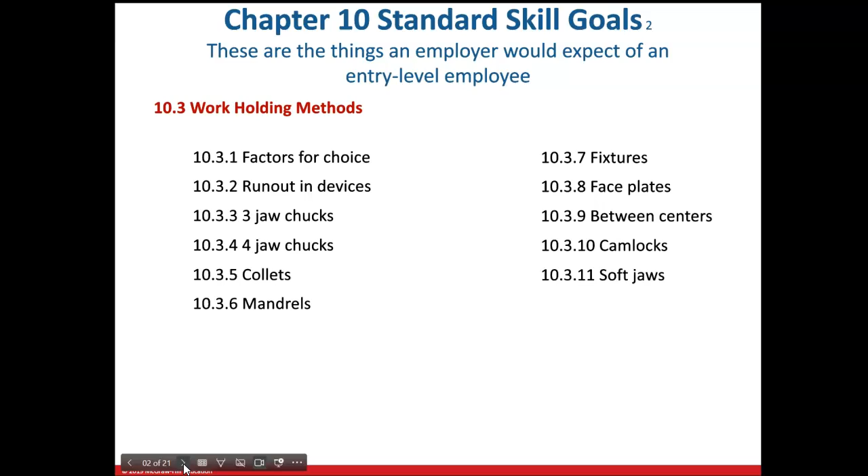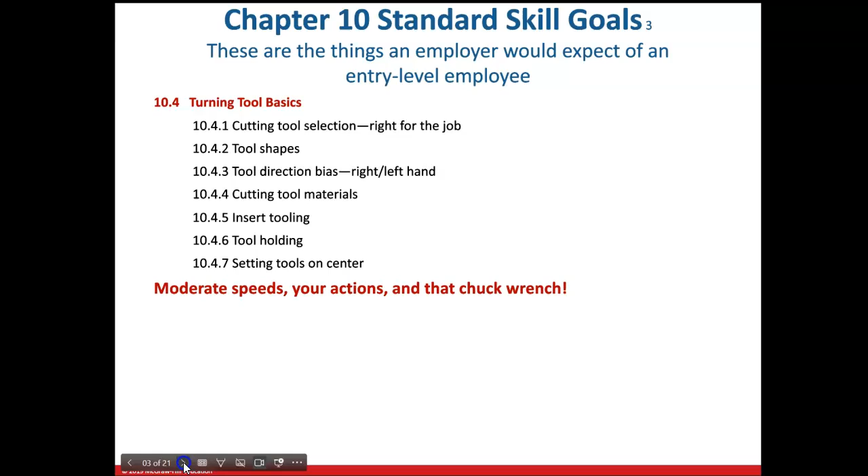Usually those include run out and weight, or size of the workpiece. We're going to talk more about some of the types of turning tools and how and why we select different types of cutting tools, and mention some safety in regard to speeds and feeds, your actions, what you're doing, and of course a chuck wrench and leaving a chuck wrench in the chuck. We'll also talk more about setting up the actual lathe and operating that as well.

So in terms of our work holding methods, we have several choices on the lathe. We have chucks—they can be a 3-jaw chuck, a 4-jaw chuck, sometimes 6 jaws as well. We have what we refer to as collet chucks. We can hold between centers. We can use a faceplate. There are mandrels and there are fixtures.

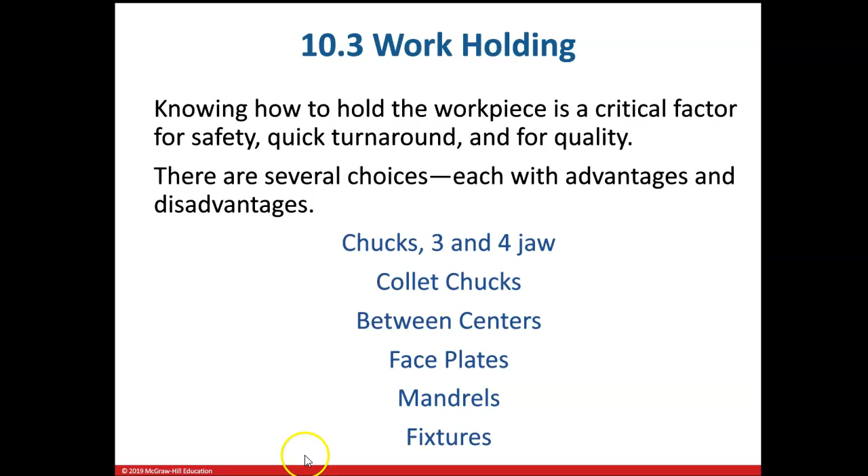Now, in the lab when I get back in, I will show you—we do have both 3 and 4-jaw chucks, we've got a couple of collet chucks I believe. I'll talk about what a center is, both a live center and a dead center, and then I'll also show you some of our fixtures that we will be using here as well.

All right, so when we are choosing work holding, we have 5 selection factors. We consider the type of work that we're working on. Are we going to be removing a lot of material, or is it just light material removal? Are we using rough bar or finished part—what are the tolerances? We're going to talk about the grip that needs to be held, and we're also going to be talking about turnaround time here as far as our selection.

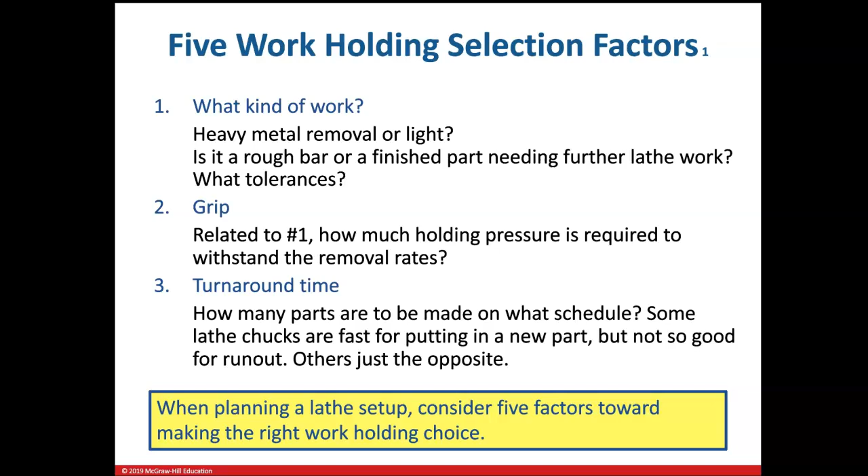Because some of these types of work holding devices are a little faster in use than others. Number 4, we'll be talking about run out, or part wobble, and then of course some special holding abilities that we might need to be using in consideration there too. So those are 5 areas that we're going to take a look at when we're looking at work holding selection factors.

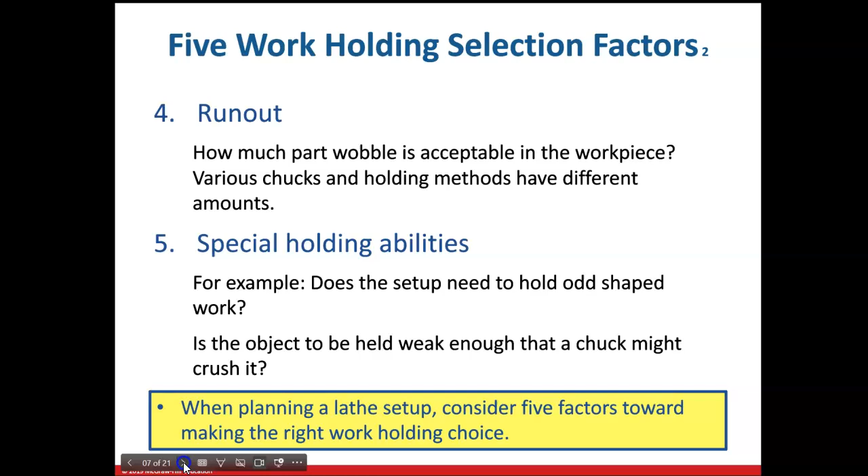All right, so our chucks are both universal and independent. On your 3-jaw chucks, those jaws move at the same time, so it's a fairly quick turnaround. If we are working with a 4-jaw chuck, each of those jaws moves independently, and it takes a little bit more time to get those set up and positioned with our workpiece to make sure that we are turning it correctly.

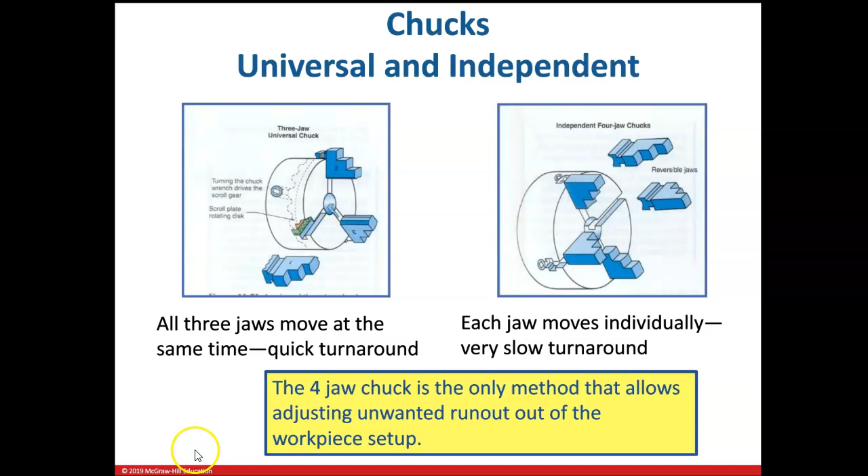Of course, if we need to turn eccentric parts, we have no choice but to go into the 4-jaw chuck, where we can turn one feature on the part and then move that off center and turn an eccentric feature on a part that would require 4-jaw chucks. 3-jaw chucks are pretty quick and easy—they all move together at the same time, clamp down on the OD of a bar, and we can go right to turning. So they're usually the jaw of choice when we're talking about turning on a lathe.

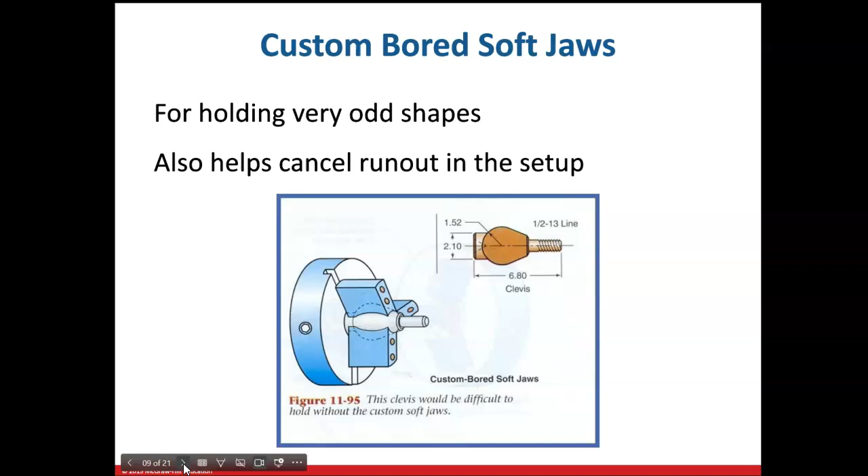So we can also custom bore soft jaws. That's done for any type of odd shapes that we might need. Oftentimes, if you're doing a first side, second side, sometimes soft jaws will be bored on the second side just to make sure that your concentricity and your run out is held close, so you don't have to worry as much about that, especially if you're doing large quantity runs.

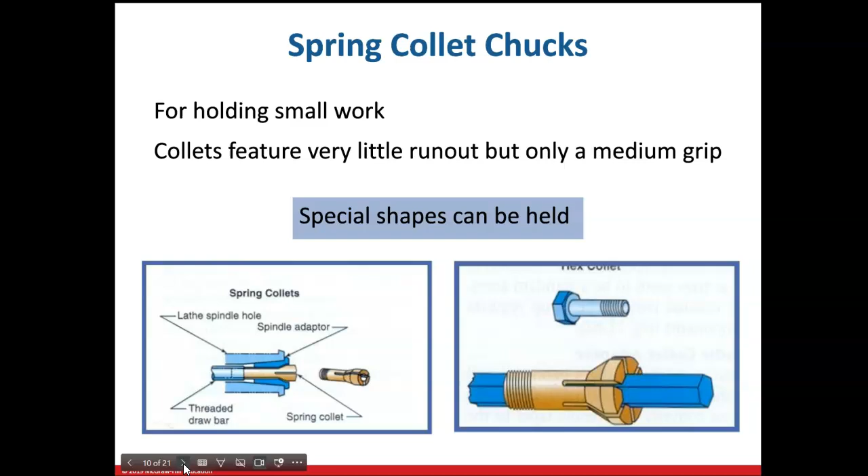So we also have what we call spring collets, or spring chucks. These are pretty similar to the collet chucks that are back there on the Bridgeport. They are size to size—we can get them in round shapes, hex shape, square shape, or special shapes, and we can use these spring collets to clamp down on that. It's also a very highly effective work holding device for turning on a lathe.

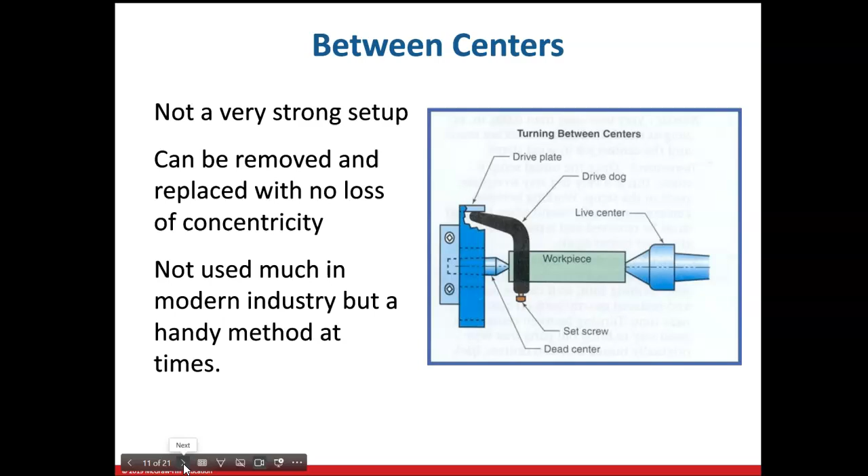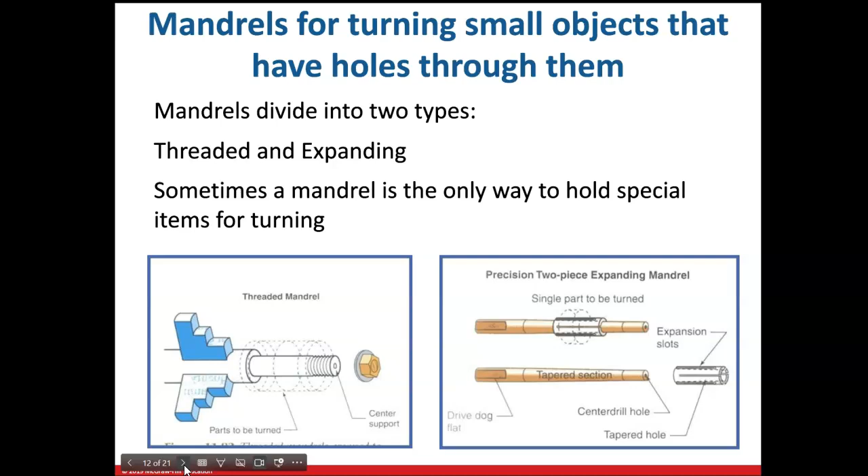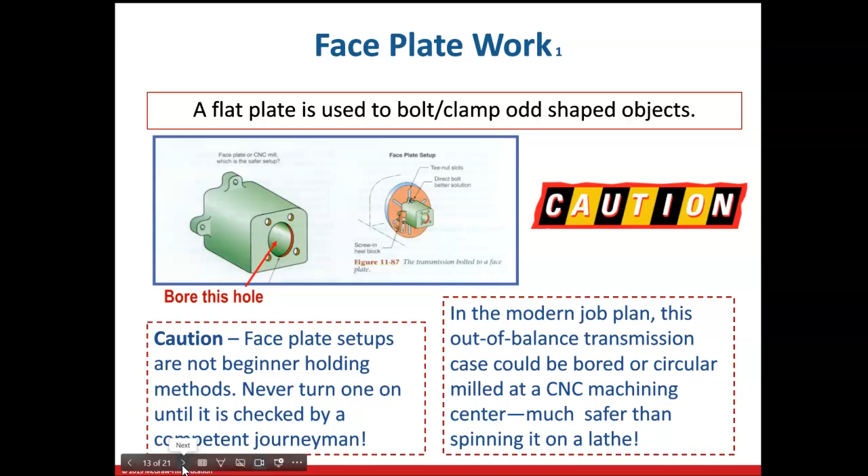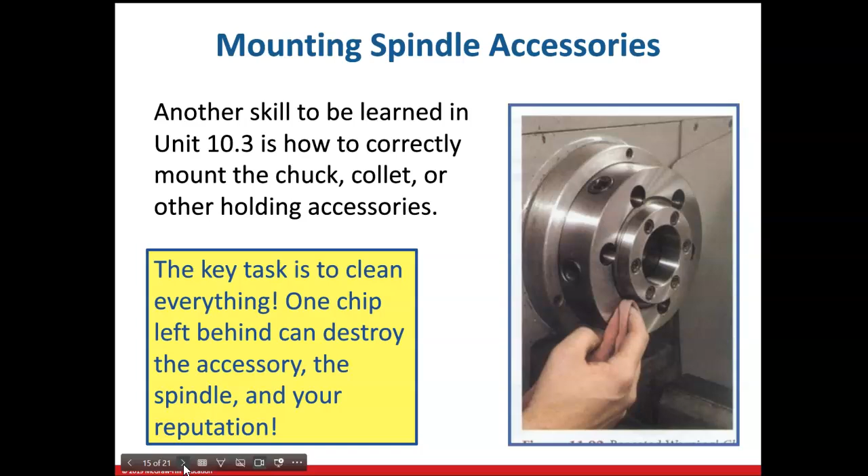When talking about mounting spindle accessories, there is a correct way to mount a chuck, collet, and other holding accessories. We have to have everything clean, because one tiny chip will basically destroy everything and leave marks, and those would then be pretty expensive to repair on our machinery and equipment.

When we get more involved in the turning tool, in the actual cutting and work holding class, same thing applies with those work holding devices. I just wanted to bring this to your attention.

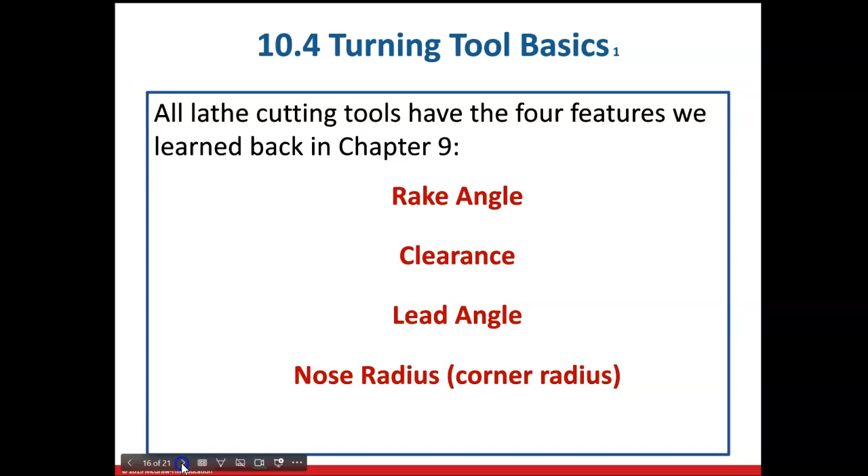We do need to be aware of what we call the rake angle, clearance angle, lead angle, and nose radius or corner radius on a cutting tool for the lathe. Here's some of the reasons for it, depending on whether we're using a high-speed steel bit or carbide, and the material we're cutting will also make a big difference.

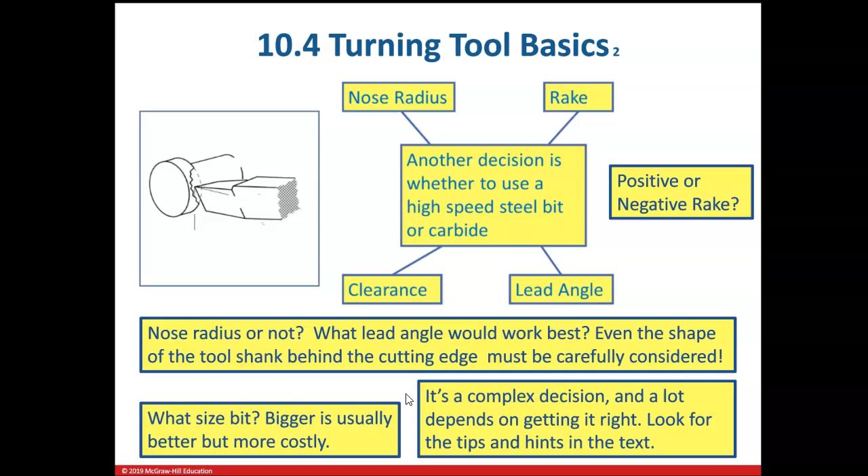If we need to take a heavier cut, we're going to need a larger bit. For smaller cuts, we'll be able to use smaller bits. Of course, whether we're machining something like aluminum, brass, or steel, a positive or negative rake will be important too.

This gets into our tool holding method for the actual cutting tools, and we need to be aware of this on the lathe. We have what we call tool posts, quick change tooling, indexing tooling, and rockers. There are advantages and disadvantages to each of these. Sometimes it becomes a preference for the actual machinist using it. Sometimes on CNC machines and lathes, you're locked into it based on what the machine tool manufacturer has supplied on the actual turret to hold the tools. So we'll go through some of those.

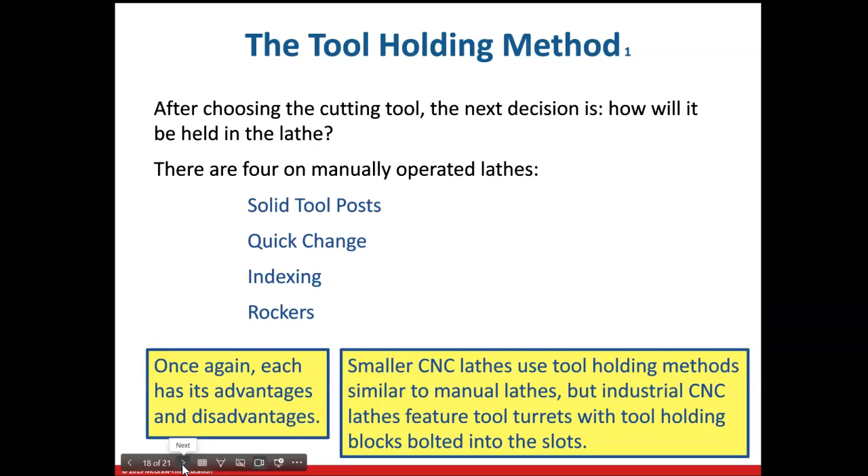Here's some examples of your quick change tool post on manual lathes. Notice the similarities to this as opposed to what we have. And then, of course, this is an example of the CNC tool turret as well. We're going to be using some of the same type of tooling, but it's going to be mounted into the machine differently.

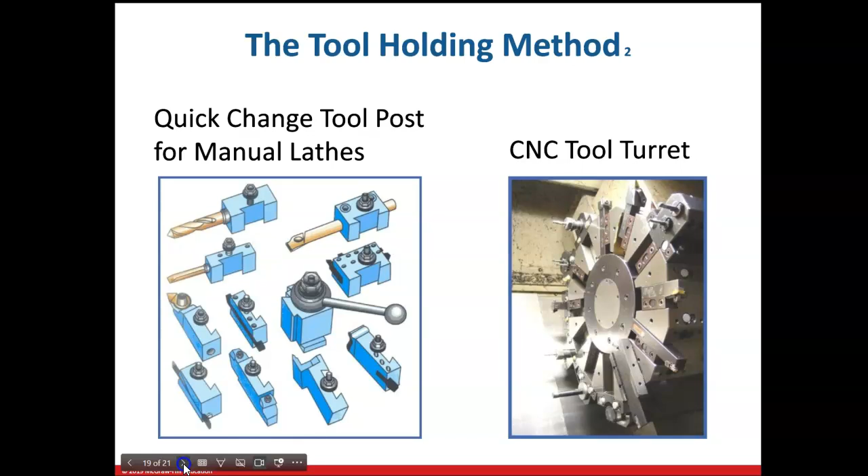So again, on safety, just to follow up, we want to make sure we are always working very safely and aware of all the potential hazards on the machine. Make sure your work holding is tightened well, your work support is also tightened and locked in place. Your tool holder bit, while sometimes you need it hanging out, needs to be tight and hanging out just enough to cut what you need to cut. And your speeds and feeds must be acceptable for the operation you're working on.

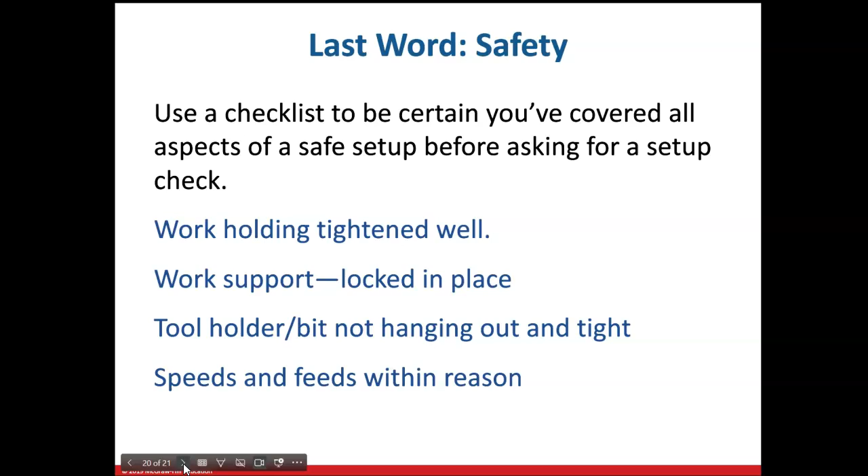Lathe safety is managed here with training and just good common sense. I am here, so make sure you are asking me questions. If you are in doubt or nervous, stop what you're doing and wait for me to come help answer your questions and ease your mind, or even demonstrate the proper safe way to use that. So don't become complacent, don't start to think you know everything you need to know.

It takes quite a bit of practice and machine time to become fully competent using a manual lathe. Remember too, the larger the part on the manual lathe, that also increases danger. And the longer the length of the piece, that also becomes dangerous as well. If it's a long piece, we need to support that piece with the use of a live center, and we'll demonstrate that in the lab so you understand what's going on there too.